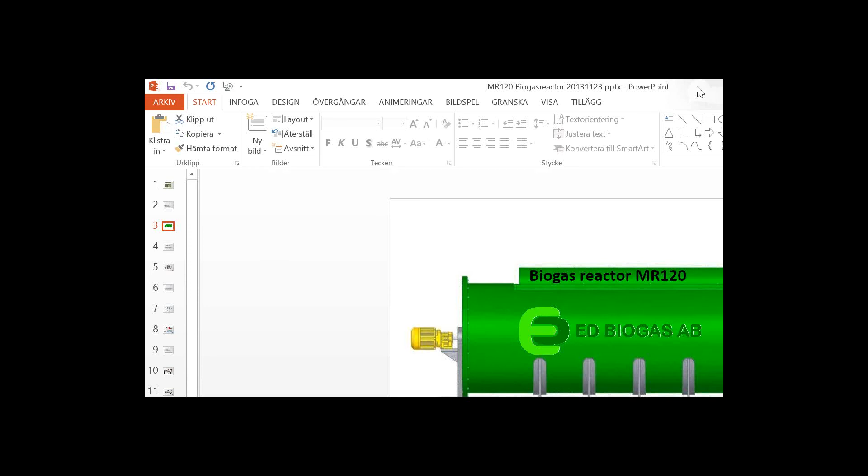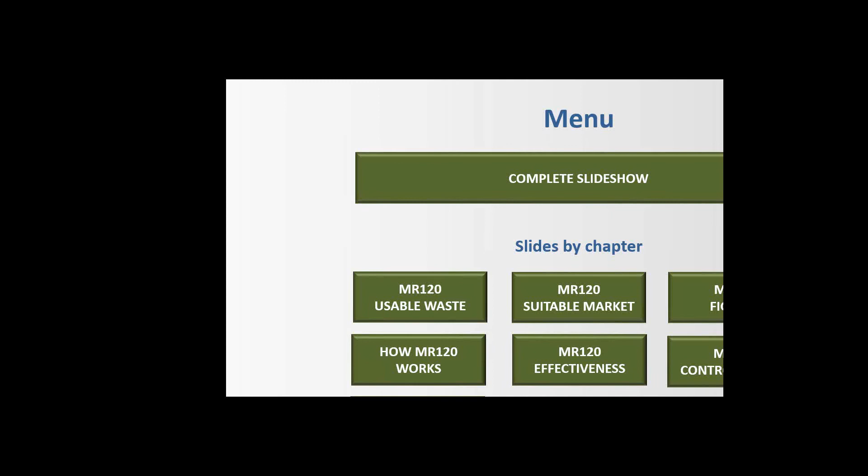Swedish Biogas Experience is the company we're working together with on water purification, sorting out waste, biogas digesters, and gas upgrading. This is the local reactor.

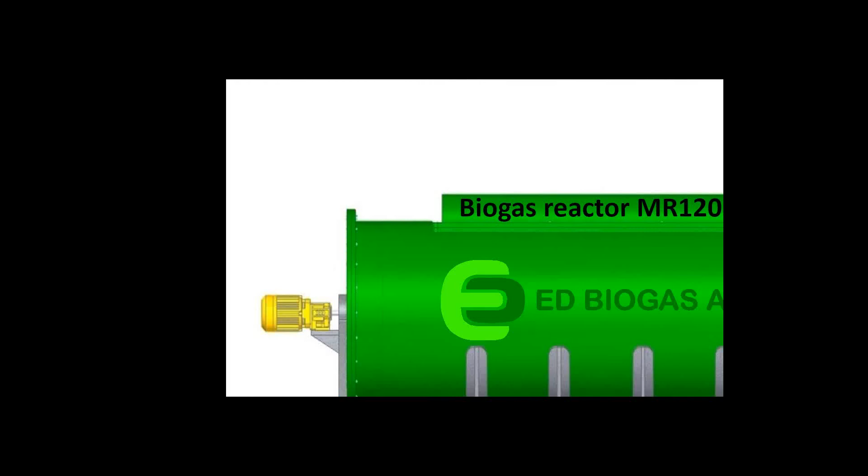It's a 120 cubic meter reactor, and above you can see the collector for biogas. We have a collector to take the gas out, and inside we have a transportation device that moves this material through the reactor, working very slowly, turning only one turn every 24 hours. We're just pushing this material through the reactor, not mixing it, and that's the secret why it produces so much gas. Because we don't mix the substrates, just push it through, we have very good order in this anaerobic process.

I have to make a break. Sorry, I'm back. Hello. Yes, Mr. Urban, we're all here. Yes.

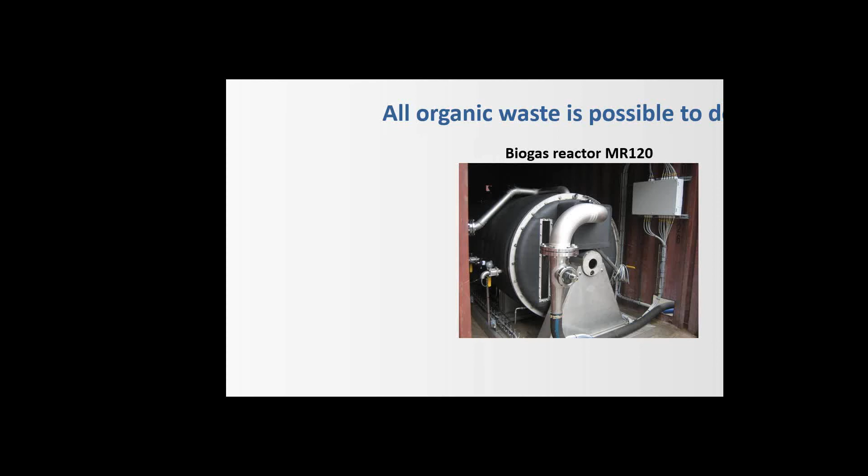What we do, as I started with this, is we use this demo version of our reactor. It's placed in a container, and we process manure, sewage sludge, food waste, slaughterhouse waste, agriculture crops, and household waste from farming, whatever. All organic waste is what we make the gas out of.

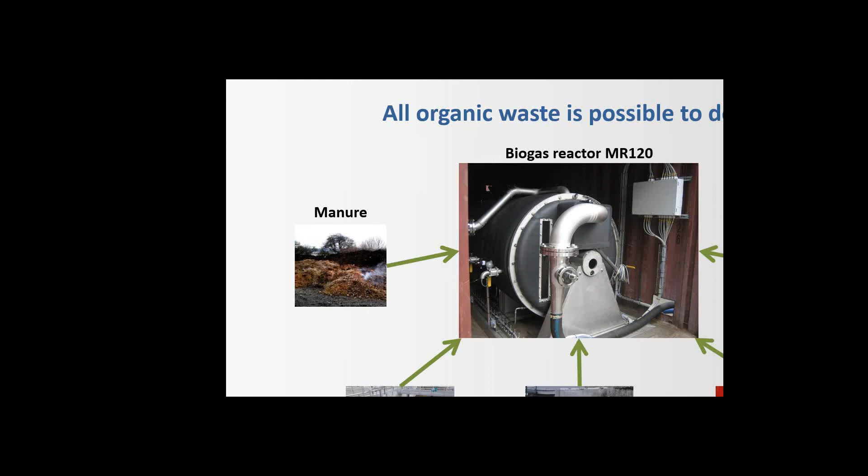As I said, the traditional problem when making gas is making the plant profitable when it's a mid or small size one. But when we produce much more gas in our reactor, we can economize it because we make so much more gas. We also have financing from deposit fees for receiving waste, and we have solved the problems with foam and sedimentation in the reactor, so we have nothing left in the reactor. We don't have any sedimentation problems, and as it is an anaerobic closed process, we don't have any bad smell.

We also take the water away. Normally the substrate contains very much water, and if you lower the water content, you have much less volume to handle in the reactor. Normally you put in so much water, and you have to heat up the water and so on, but we have reduced this process.

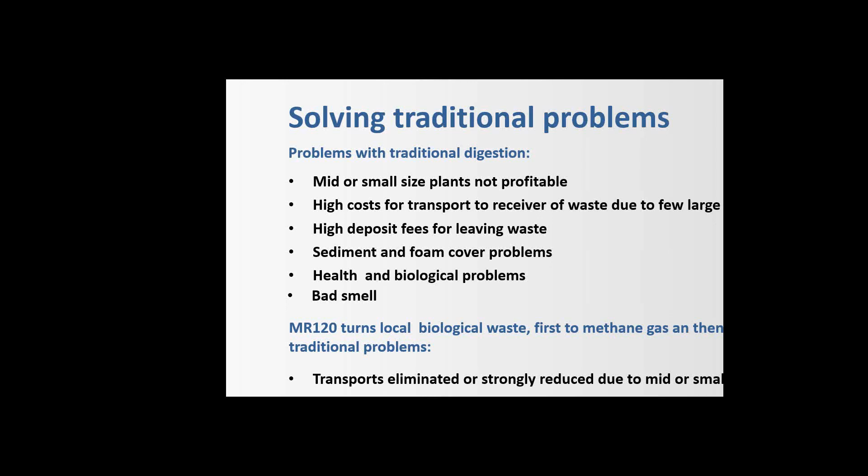This is the thing we do in the reactor. Our equipment for making the substrate move forward also takes the foam away from above and takes the sludge away, so we don't have any sedimentation. This device turns only one turn every 24 hours.

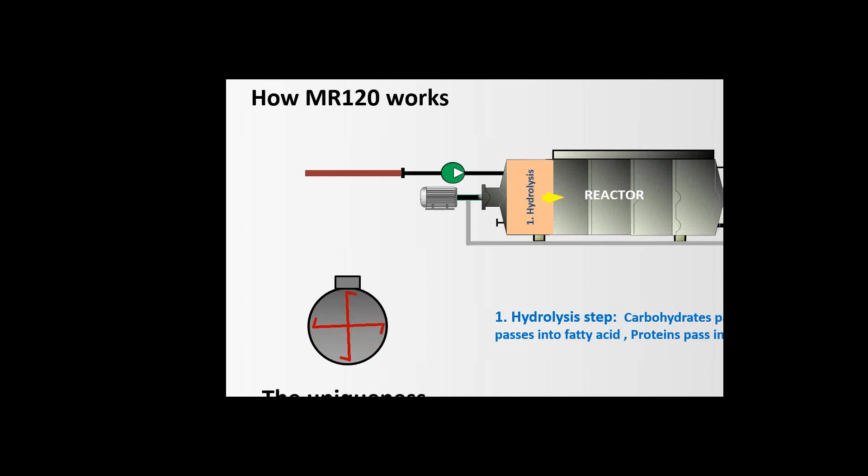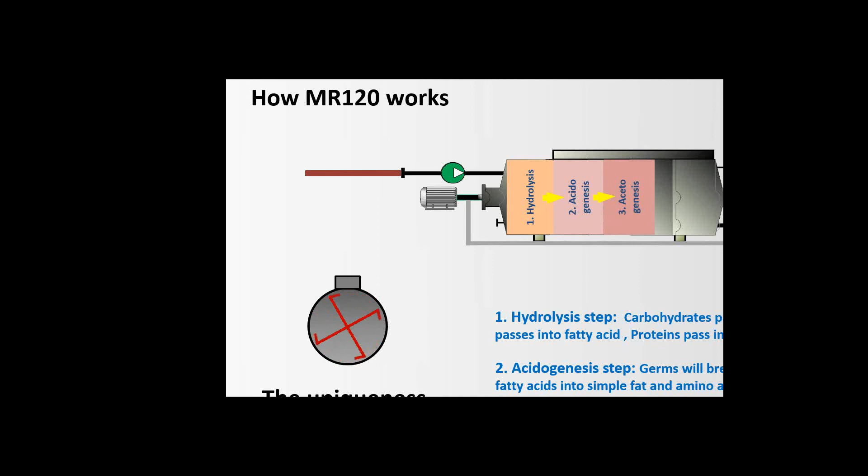As I explained before, the first step is the hydrolysis step, which you have to have. The acidogenic step is also something you have to do for making gas out of it. The acetogenic step is number 3, and at last you make the methane gas out of the substrate. We think we have very good order in our reactor to produce the gas.

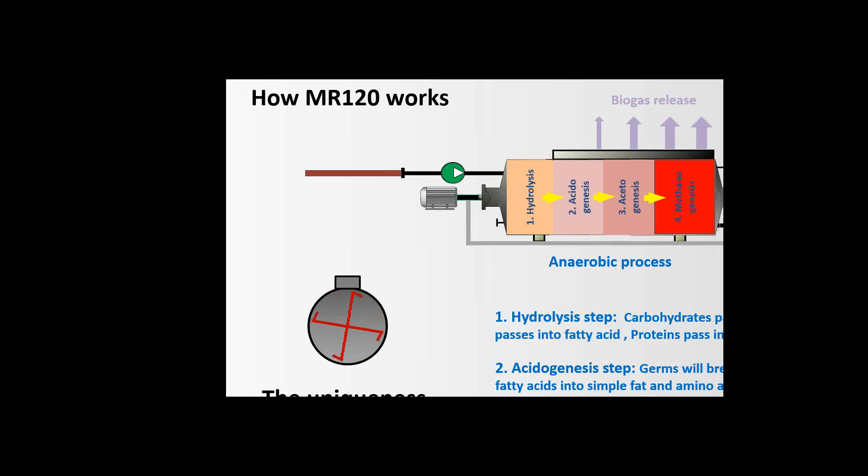As I said, the figures, we have a reactor of 127 cubic meters, but today we are working on a project where we can also use much bigger tanks, using our reactor for pre-hydrolyzation of the substrate so we can manage much more substrate.

Then we do a pre-hydrolyzation of the substrate to get it started, and we take much of the water away before it gets into the reactor.

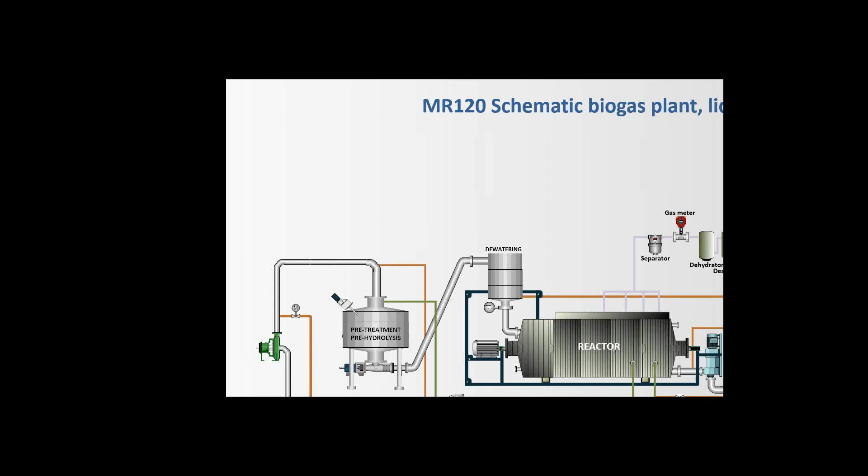When the gas gets out, we also have a system for dehydration and desulfurization. So before we use the gas for household or for electricity, we take much of the water and sulfur away from the gas, and that saves a lot of engines.

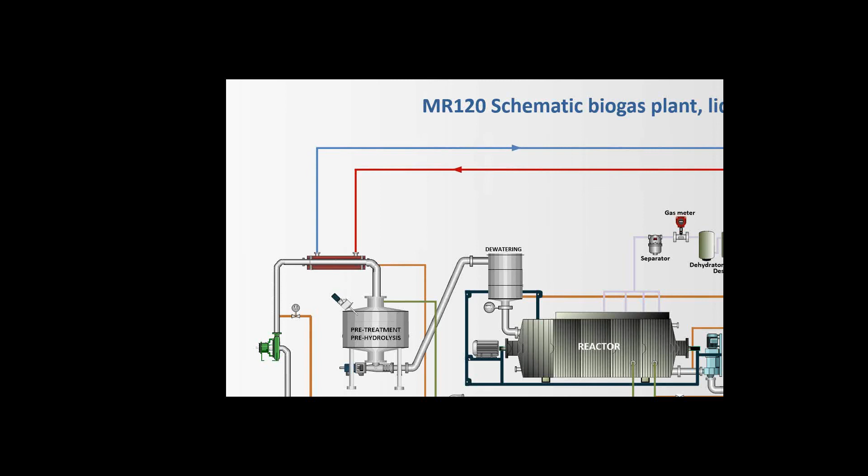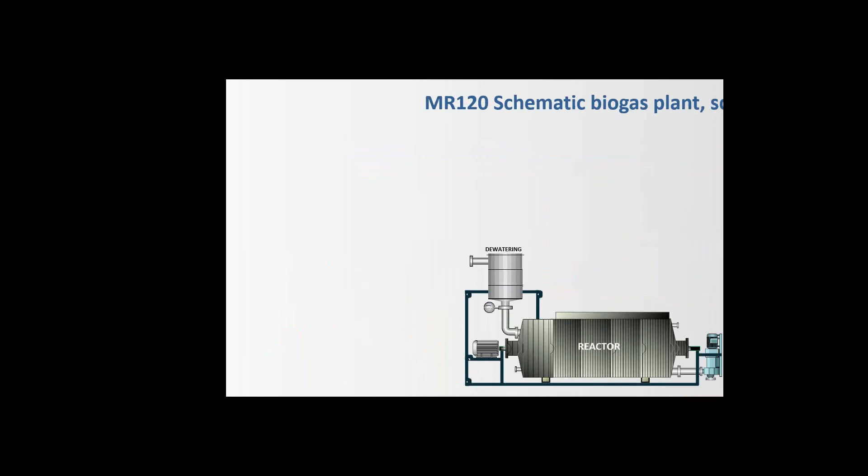If we have solid waste, we can do it another way. Then we have a mill that crushes the substrate to use it the same way as we do for liquid waste.

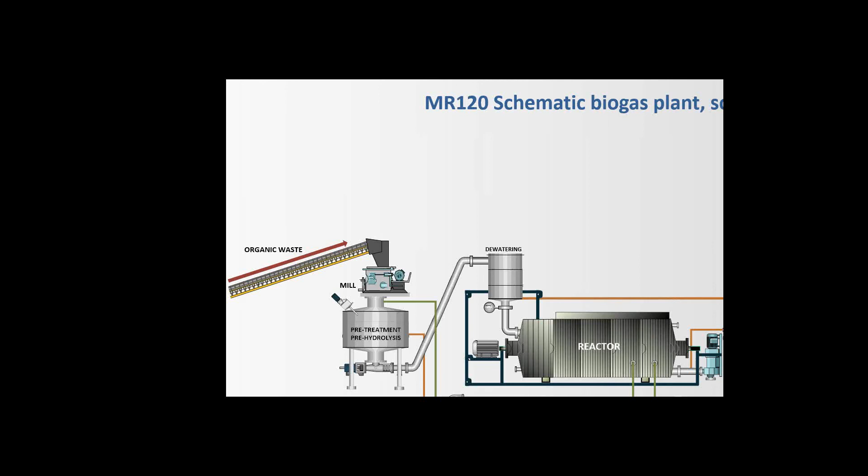This is just a schematic of a biogas plant, how we do it. We heat the substrate up in the reactor to use 55 degrees, but we can also use a mesophile way in the reactor. We don't have it, but then we get approximately 30% less gas out of the reactor if we do it without heating.

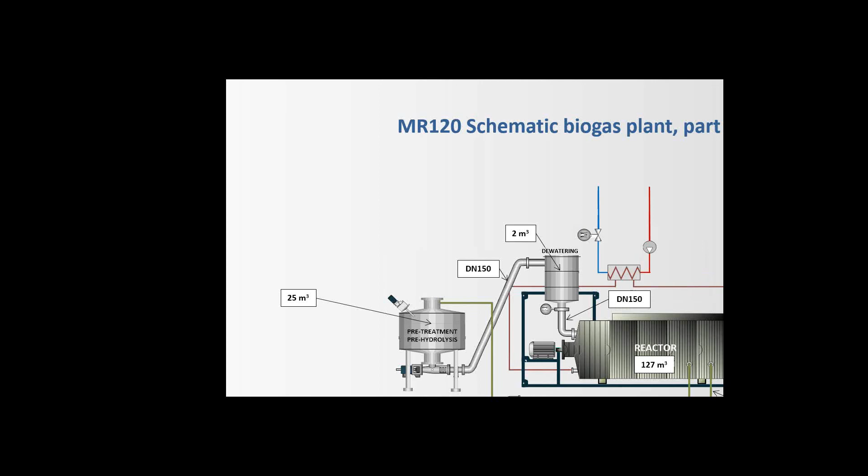And options for the gas: if you have a gas engine, the efficiency from a gas engine is perhaps 30% electricity out of it and 60% heating.

We can use a micro turbine, and if you do a life cycle cost analysis from a micro turbine, you can see in the long run that you have much more efficiency from micro turbines to make electricity out of it.

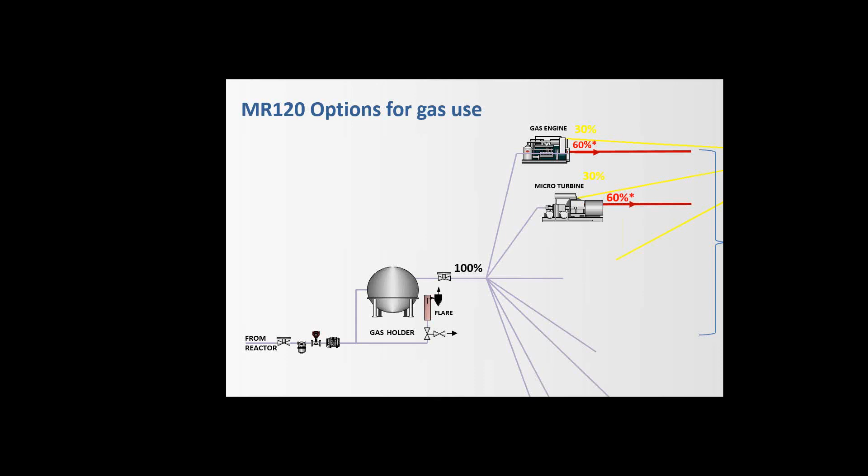We can also use a fuel cell to make electricity and heat out of it. We can use it in a boiler to heat up the water for domestic and household gas. We can upgrade the gas to methane for vehicle fuel, and we can also make it into hydrogen.

The losses from the gas engine, microturbine, fuel cells and boilers are between 10 to 15% in the system. Losses from the methane and hydrogen process are approximately 10%.

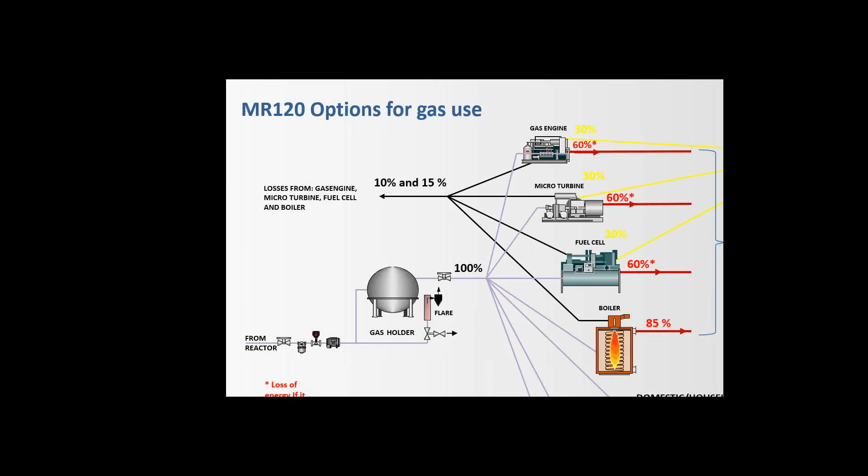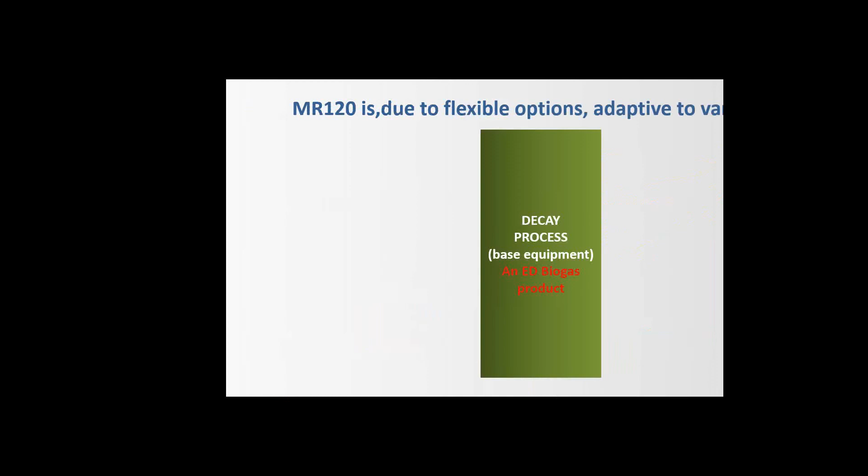As I said, we can do it in a mesophilic or a thermophilic way in the reactor. The reactor is developed to make as much gas as possible out of it, and therefore you can use it for continuous production of electricity, and also for continuous processing of vehicle fuel.

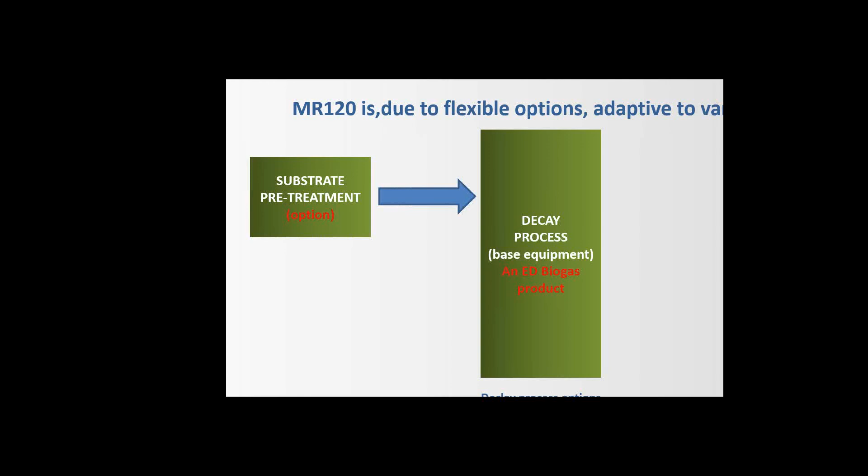As we build the reactor, we connect with other companies who make the electricity-producing motors, and also deal with how to use the gas in other ways, or for upgrading.

In Sweden we have a regulation that says if you hold the substrate for 7 days at 50 degrees centigrade or 2 hours at 70 degrees centigrade, you get a hygienized product that's let out of the reactor. In our case, we have up to 10 days at 55 degrees, so we consider that we have a hygienized product that comes out of the reactor.

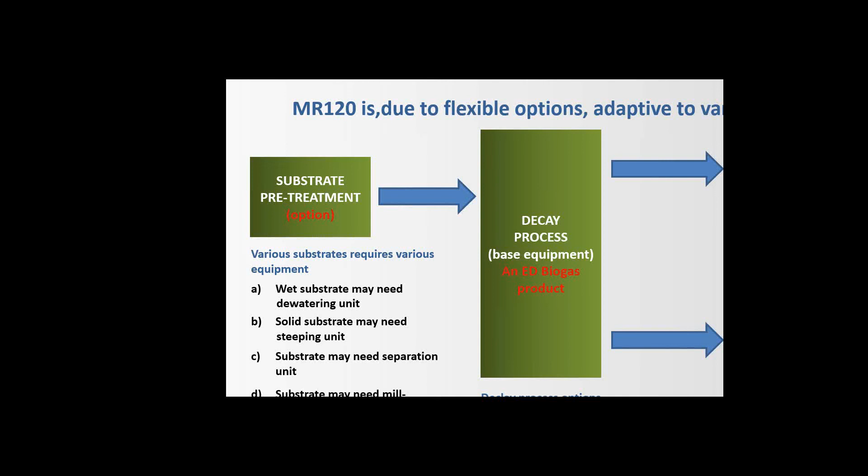We also have supervisory control of this system. We can support those who run the equipment through an internet system. If you only have a telephone, we can support the one running the reactor, including gas production and any consumption data given from this system.

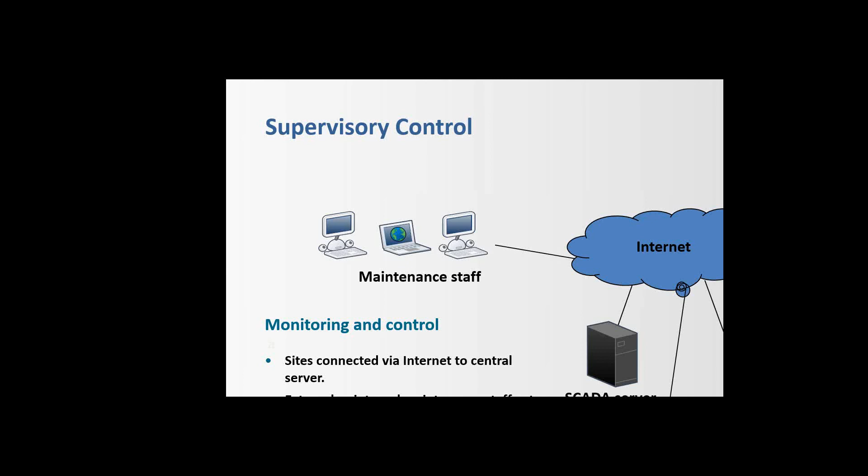We also have a very good controlling system for this, which is SCADA based. We also have a monitoring pre-treatment system so you can see whatever the reactor is doing. And if we connect to the internet, we can also see that and help the staff who are running the equipment.

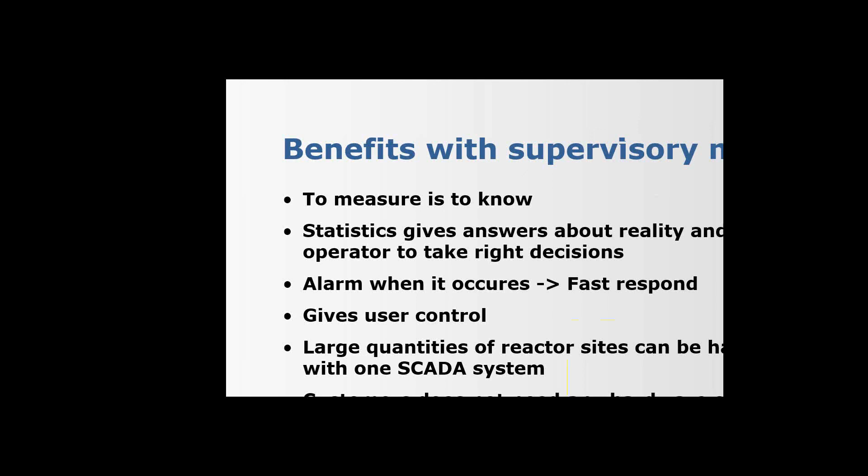And also the gas system, we can see that on screen.

Our target customers for this are water treatment plants, pig farms, cow farms, chicken farms, rice farmers, greenhouses, groceries, fruit farmers, household waste, and slaughter waste. There we have some details for connection.

When my presentation is over.

Our company's vision is that converting raw biogas to electricity and heat is not economically feasible, and we promote that such companies and future potential buyers of facilities for production of raw biogas should consider already now converting raw biogas to biomethane. Until now, it was a challenge to economically upgrade or enrich raw biogas to biomethane on small and medium flows of raw biogas. That's why we, NeoZeo, focus on small and medium volumes.

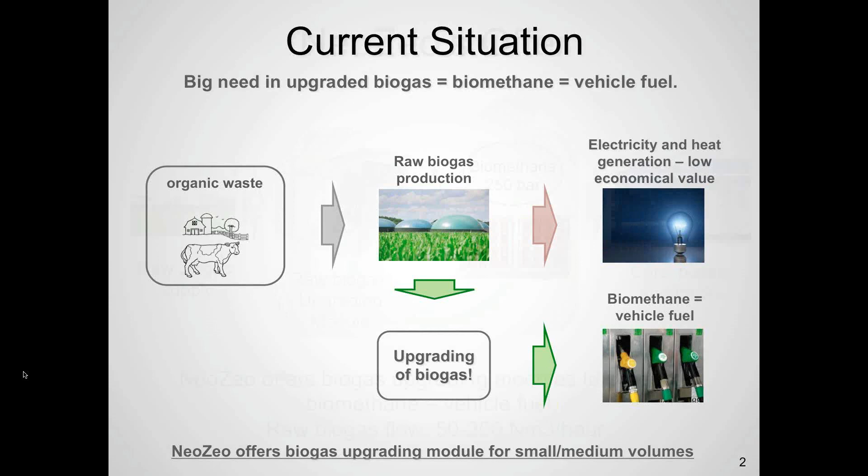Small and medium volumes correspond to 50 to 200 cubic meters per hour of raw biogas. A typical farm would produce approximately 100 cubic meters per hour of raw biogas. NeoZeo offers a model like you can see on the slide: it's a kind of container which contains all our equipment, which can be placed next to a raw biogas production facility.

You just plug your flow of raw biogas into the container, and outside of the container you get biomethane. Biomethane can then be compressed to 200 or 250 bar for different purposes. One purpose is to store the biomethane for different uses, or it can be directly compressed into vehicles - cars, buses, trucks, and even tractors.

The advantage of such a solution is that it can be delivered to any part of a country around the world without roads, and a local producer of raw biogas from organic waste can produce local vehicle fuels independently from any kind of natural disasters, or independently from a country's infrastructure - for example, without any roads, without access to possible natural resources like fossil fuels, diesel, gasoline, or natural gas.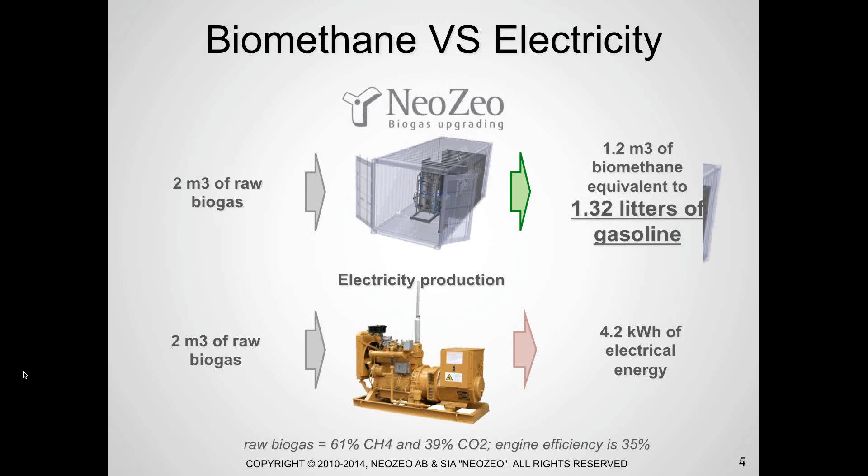We use that property in order to separate carbon dioxide from methane. More or less, when we push gas through such a column, carbon dioxide is stopped by the adsorbent, and at the other side of the pressure column we get pure methane. All this equipment is inside the container, and a picture of the container model, the PSA model, is shown on the right side of the slide.

A second advantage of this technology compared to other technologies for biogas upgrading is that it doesn't use any water. It's only a porous solid material, and it does not use any other chemicals, liquid chemicals like amines.

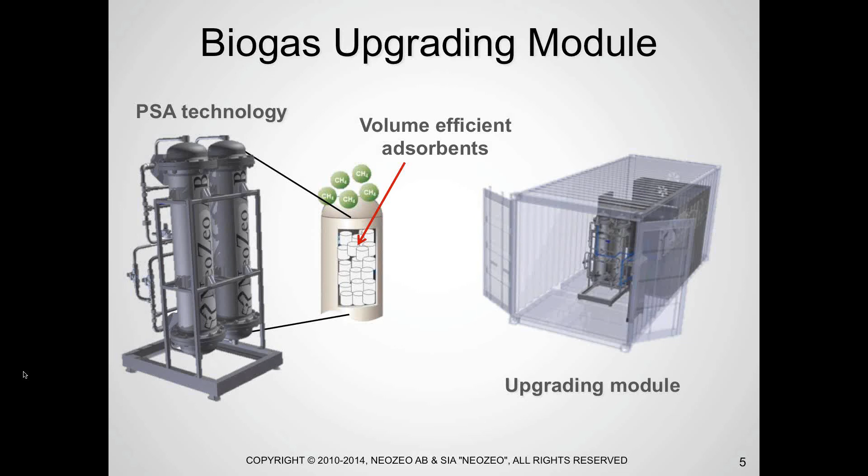Advantages. For example, if you are a producer of raw biogas, you will definitely get extra profit compared to production of electricity.

You can use the produced biomethane for your own tractors, trucks, and buses. And if you are still interested to produce electricity, then you will get the advantage of storing biomethane and utilizing that biomethane in a more efficient way.

For example, if during night you don't need electricity, then you can store the biomethane overnight and utilize it during the day, where the use of electricity is more important for your business or for a local community.

Another advantage is, of course, environmental advantage, where you don't need to deliver fossil fuels to your local community. You can be independent from fossil fuel, and you save the environment by not polluting it with burning fossil fuels. And for a distributor, if someone of you is distributing fossil fuels, it will be an advantage

because you will reduce the transportation cost for fossil fuels, and then you will get more vehicle fuels to the local customers. And of course, there's an environmental advantage.

I believe that every business will get quite substantial benefits, not only from a marketing point of view, but also economical benefits based on environmental advantage.

Here I placed, I'm not sure how many of you are engineers, but I decided to place a simple process diagram where we can follow.

Our team, our expertise is mainly on porous material. We continuously work on different innovations and improving our porous materials, which we are utilizing inside of our pressure swing adsorption unit, for production of biomethane.

And our expertise lies with Professor at Stockholm University, Lennart Bergström... Niklas Hedin, who runs projects on porous material with researchers at Stockholm University, for example, Zoltan Bacsik, Ocean Cheng, and Panagiotis Krokidas.

Also, we have professional people who help us expand our activity on the business level, who is Thomas Arctaedius, and our investors who are not written here. It's Primacia Capital.

And we have also researchers and engineers in Latvia. These researchers at Riga Technical University are working on the improvements of our technology.

And in parallel, development of different other parts, more engineering parts, not relating to porous material.

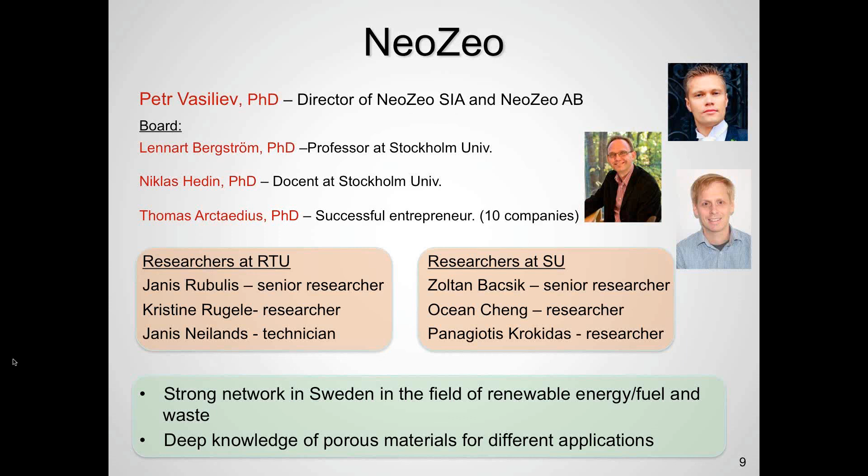The methane losses will depend on the quality of biomethane or the quality of raw biogas which you supply. If a typical raw biogas production plant has some air inside, and air is a mixture of oxygen and nitrogen, that would provide higher losses for biomethane. But losses don't mean we just throw it to the atmosphere - we definitely handle it with a burner. At the same time, losses correspond to your costs. The more columns placed at your facility, the more pure biomethane you will get, and the less losses you can achieve. At this moment, the losses can be from 1 to 3%.

Okay, thank you, Dr. Petr. Depends on the interest of the final application. Okay, thank you, Dr. Petr. The next question is, what are the pressures on which the system works?